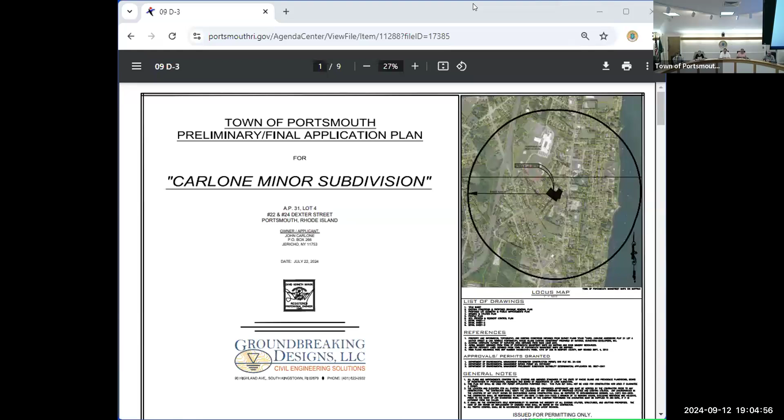If you could just state your name, address, for the record, you're losing you. State your name, address, company for the record, and if you have a business card, give it to the secretary, that would help as well. Dave Manoni, doing business as Groundbreaking Designs, at address 90 Highland Avenue in South Kingstown, Rhode Island.

And I notice there's members of the Carlone family here tonight, so you're authorized to represent this petition. Yes. Thank you.

All right, if we can begin with sheet 2, conditions. First of all, it's been brought to my attention that some of the abutters have come into the town hall and expressed some concerns. So I'll first go through a brief description of the project, and then I can address those concerns. And if we need to go into further detail, we can do that as well.

So typically what we'll do is allow you to present your preliminary plan, the board can ask questions, we'll have some back and forth exchange, and then I'll open it up to the abutters. All right, okay, that's a good plan. Thank you, Edward.

All right, so we have AP 31 lot 4. It's about 2.8 acres, and there's existing development on the site, as you can see. We have an existing 4-bedroom dwelling, as well as an existing 2-bedroom dwelling, each with shared driveway access, public water access, and each serviced by their own septic systems, which are not conforming.

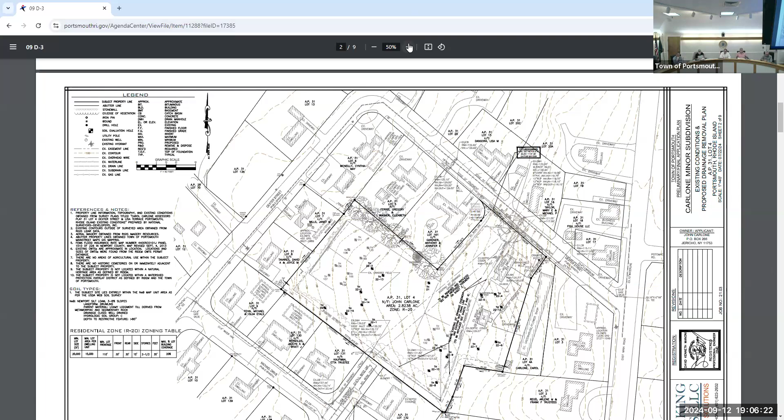On the site we also have existing town drain lines, 12-inch reinforced concrete pipes that run from Lisa Terrace along the southern and eastern property lines, across just west of the 2 existing dwellings, and up into Dexter Street where they connect into an existing manhole. There are also existing sub-drains on the northern and western property limits that extend across the northern property and discharge into the existing catch basin on Dexter Street.

There has been a previous DEM application on this site, and that's where the sub-drains came into play. Approximately in 2007 there were test holes and wet season monitoring, with the intention of doing what we're doing now. The previous owner, John's father, had hoped to develop the site this way. So that's what those sub-drains and old test holes were for.

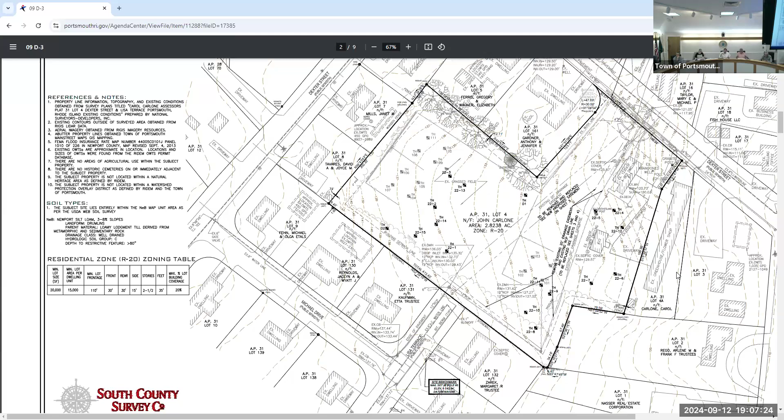So if we go to the next sheet, please, Leah. This sheet shows what we're proposing to accomplish.

We'd like to extend the existing Lisa Terrace into the development as a cul-de-sac, subdividing the lot into 5 residential lots. After multiple conversations with the town, we're planning to remove the existing 12-inch reinforced concrete pipe and replace it with an 18-inch reinforced concrete pipe, improving the drainage system, running it straight across the property within the proposed town right-of-way, then cross-country through the property into Dexter Street via an easement.

We're also proposing to connect and create a 6-inch water line that runs through the property line adjacent to the proposed drain line. Right now the water department has a dead end on Lisa Terrace, and this project will help improve that dead end water line, connecting it into the system to improve the water system.

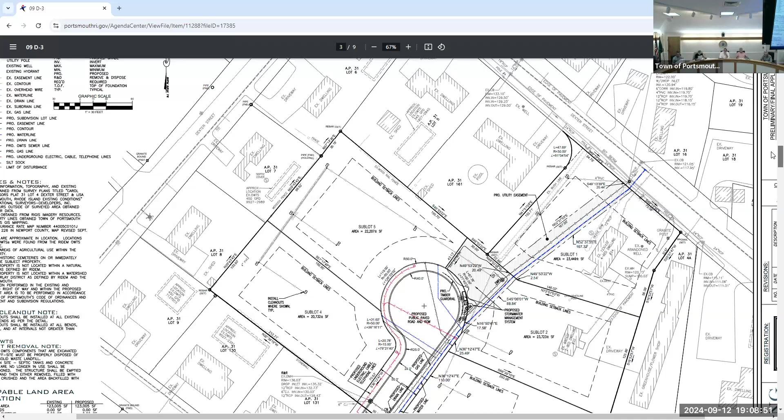At the end of the proposed cul-de-sac is where the drainage basin and drainage BMPs are proposed. We have received all of our state permits, including subdivision suitability from DEM, as well as our stormwater and RIPDES permits from DEM. So DEM has approved this plan for their use.

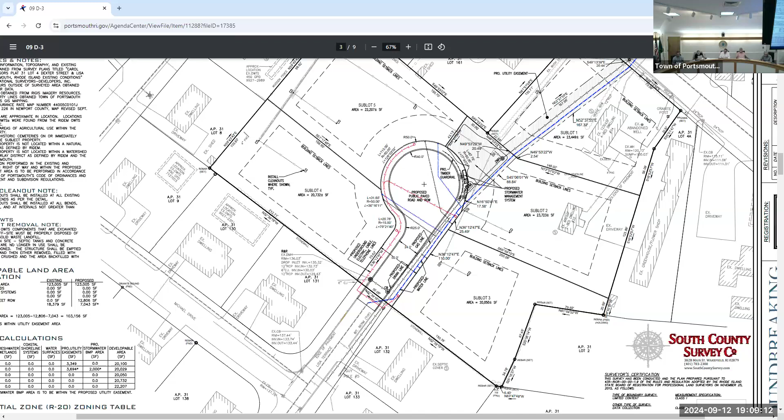And if you go to the next sheet, please, Leah. Just to back up one second, did you say all the DEM permits are in, or just the RIPDES? Both. So this plan just shows in greater detail the proposed development with grading, call-outs, and so on. So that's it pretty much in a nutshell.

Each building is proposed to be serviced with on-site wastewater treatment systems. We are also proposing to improve and update the existing non-conforming septic systems currently servicing the 2 existing dwellings, so they will have new permitted on-site wastewater treatment systems.

Could you go into a little more detail? I know you said there's an existing drainage easement that goes around the circumference—that's the 12-inch pipe? Yes, that existing drain line is a 12-inch reinforced concrete pipe, and we're proposing to remove that drain line and put in a new 18-inch reinforced concrete pipe, as well as put in a new easement for that pipeline.

And you had that discussion with the Public Works Director? Yes, we had multiple discussions, including a TRC meeting. Got it, thank you. And while we're talking about the TRC meeting, the fire marshal was there as well. He has looked at this plan and approved the design of the cul-de-sac, and also mentioned that a hydrant was not necessary. Does the plan in front of us have the extra hydrant he wanted? No, he said it was not necessary. Okay, all right, thank you.

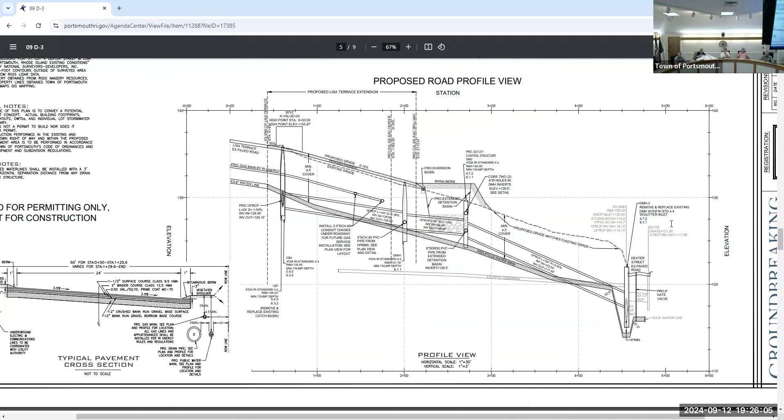Oh, so I'm over here. This is me right here. Okay, I'm looking at the bottom of it. This is me right here. So you're at AP 31, lot 2? Is that you? 2856. Okay, this is me here.

Now, right here, there's a building which is one of my garages. Right here, there's a small doll shed, which used to be called a dollhouse. The nuns in the convent used to play there. Right next to it, there's a rock sticking out of my backyard, probably about 2 feet high. That's the top of the ledge, but that's not on this property. It's on your property, but it's only 10 feet from the wall. I understand that. So it runs that way. Okay, thank you.

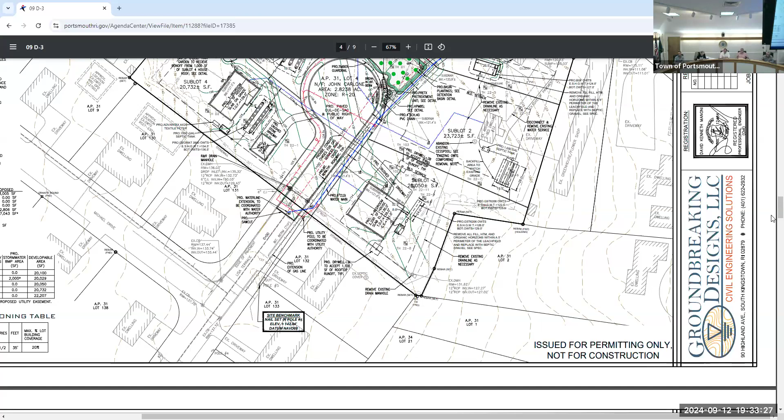What's the question? Has the great horned owl just been observed around the site, or are you confirming they're on the property? I have a picture. They live in 3 trees—two of them are on the property. I have seen an owl on the site. It was not on the property itself—it must have been in that shed, I believe. That's their hunting area.

All right, we're just trying to determine the board's concern. For protected bird species, some regulations could restrict disturbances during a certain season, like a restricted mating season. I don't know, I just read what the act states. So we can put a note on the plan: don't kill any owls. Does that take care of the wildlife? That answers some of it.

You have a question, Kate? Go ahead. Yes, on your test hole data, I'm not familiar with FSL—fine sandy loam, CH—channery, VCH—very channery. And then we do see the decomposed shale.

Anything else, Kate? ESHGWT—is that estimated seasonal high groundwater table? Well, here we have some at 2 feet, some at 10 inches, some at 54, 60 inches. But yeah, it does look like it's variable, which is, like I said, because there's been a lot of holes dug.

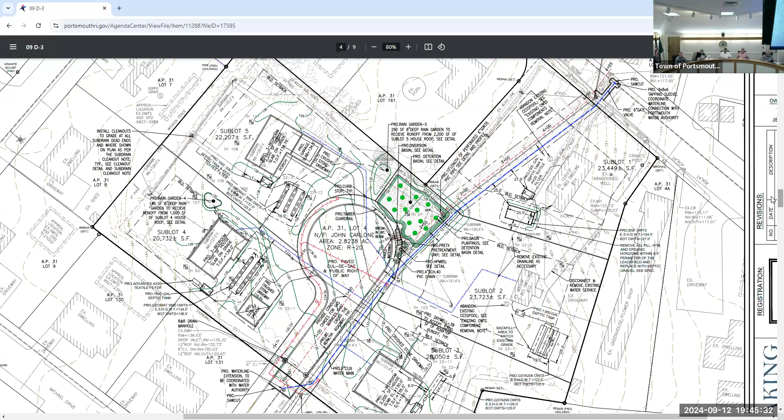They just said we were next, I think. Mrs. Chappelle, hold on one second, I've got to go back to my agenda item and read it for the record.

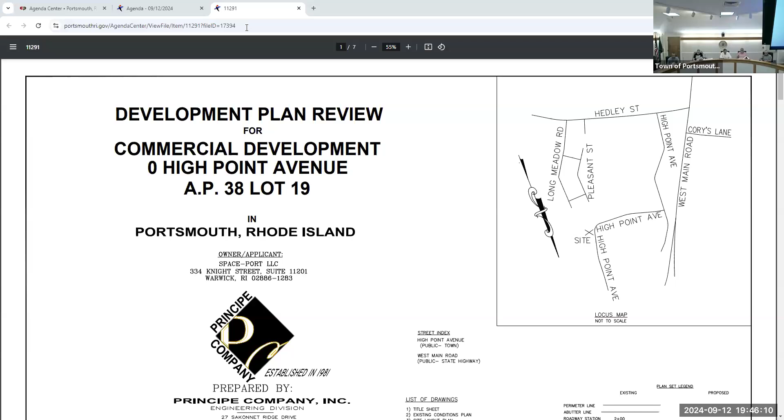This is a plan review for a pre-application for Space-Port LLC, applicant and owner for property located at 0 High Point Avenue, tax assessor's map 38, lot 19, zone light industrial, limited light industry. The applicant is requesting to construct an 80 by 196-foot boat storage facility, which requires a dimensional variance and special use permit due to the size being larger than 7,500 square feet. It qualifies as a major land development, unified development review. The submitted application is a pre-application; there will be no vote taking tonight.

Mr. Chappelle: How are you, everyone? Nice to see you. I'm just really going to give you a preliminary of what this is, that's all it's on for. One of the reasons it's on as a preliminary is because of the new state rules for the size of the building. This gets done as a major plan comprehensive permit review.

And as a major plan comprehensive permit review, it comes back to you as master and preliminary and final, which can be combined. But it's kind of new to the town and new to the zoning ordinance. It doesn't really say whether it goes to design review or not, but we're going to design review. By getting here conceptually today, it's part of the step to refer us over to design review. We also had a full TRC, the Technical Review Committee. You may or may not have notes, but I'm going to tell you what happened and what you'll see when we come back.

First, we should understand this is a project that is a warehouse in the industrial park, and it's a permitted use in every heavy industry zone, every light industry zone, and even in commercial zones. But in the industrial park there's a special set of circumstances, different from your general limited light. It says here's what can be there and here's what can't. We fit in there. But when the town passed the limited light industry, which is only this industrial park, they said every use will be a special use permit. Special use permits are not your forte because we normally go to the zoning board.